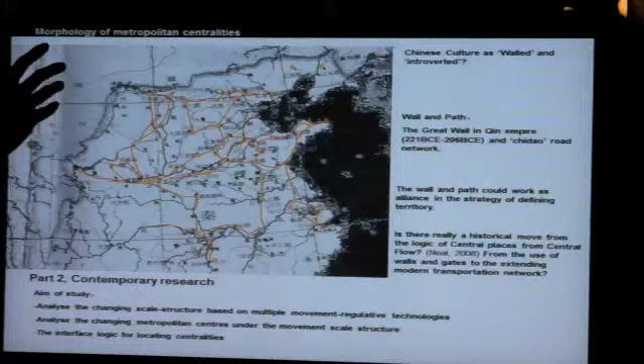I'll focus on this strategy of making paths or making networks, and how making networks could be a strategy.

This could be a spatial strategy to further stabilize the centralities we had before, in two scales: metropolitan and local scales.

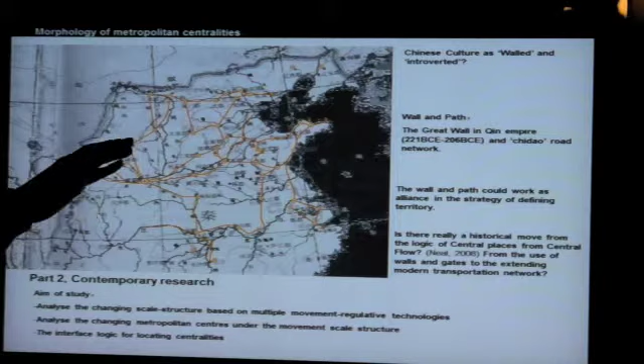There was a belief among central flow theorists that there was a historical transition from old cities to our contemporary urban life. It used to be that walls and gates regulated our daily movement in the city, but now it's more like open networks that play a dominant role.

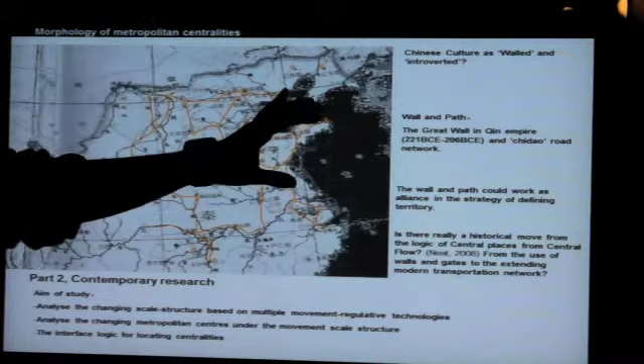So there's a kind of transition from the logic of central place theory to central flow theory, and I'm doubting if it is true. That's also a question I bear in mind for the next part of the research.

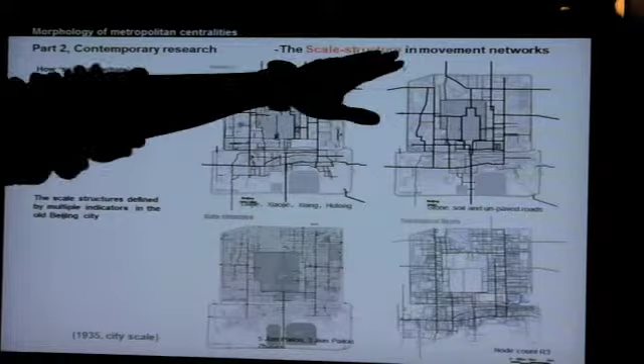First, I need to explain how this scale structure in movement networks was articulated and constituted. It is defined by multiple movement regulation technologies throughout history.

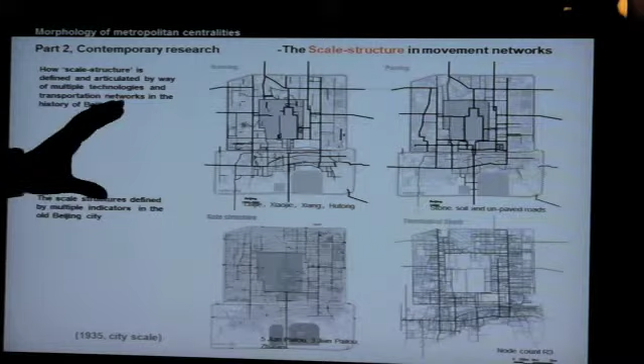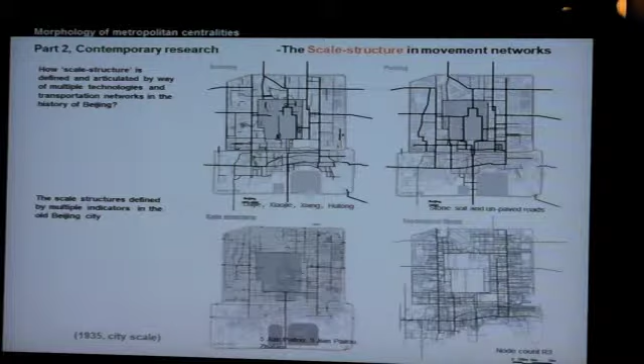In traditional historical cities, there were many systems showing that space is different. Certain streets are used for traveling between different cities, certain spaces for traveling between neighborhoods, and certain streets designed only for travelers inside the neighborhood.

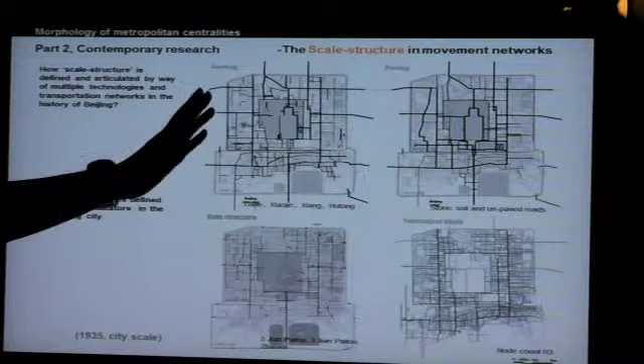This is reflected in the naming of streets. For instance, in Chinese we say 大街 (great street), 小街 (little street), 巷, and 胡同. There is a hierarchical structure in the way streets are named.

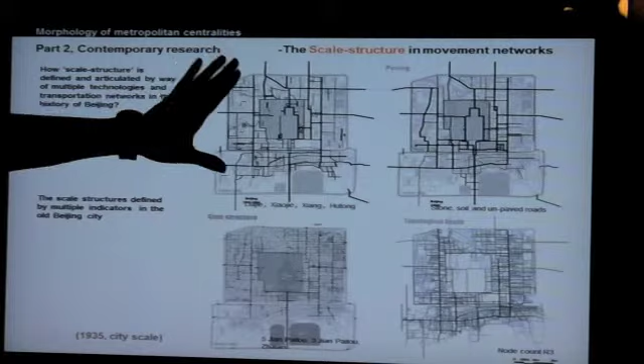This map shows that kind of structure, which is also reflected in how streets are artificially paved. Important streets are paved with expensive, dedicated stones and are wider, while minor streets are sometimes unpaved or just paved with soil.

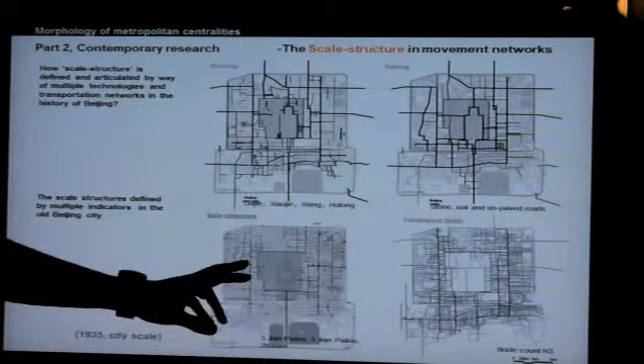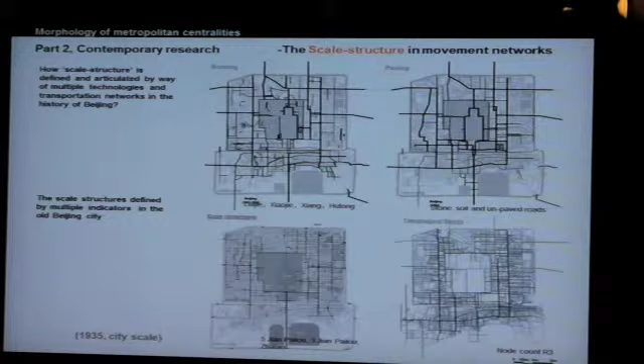This can also be seen in how gated structures, as I showed before, are placed. Important streets have well-decorated gated structures with more entrances, while minor streets have very simple gated structures. From this, we can see similar structures.

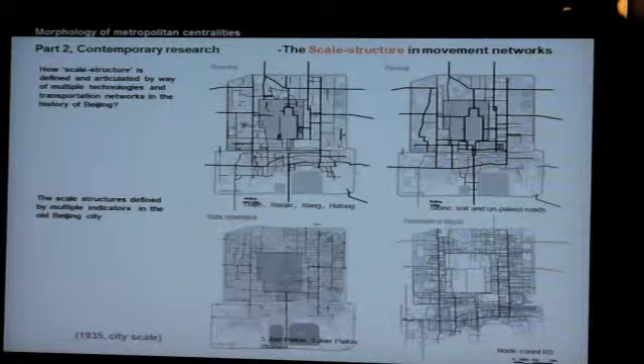We also have other technologies like space syntax and other configurational techniques to show this kind of difference, and for the regional scale we can see similar examples.

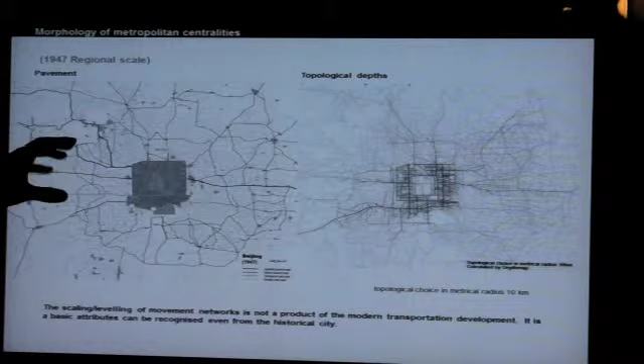This map shows the different types of pavement, compared with the space syntax maps. I have also studied different transportation technologies, like the development of railway and highway, and on this map I only show the development of buses.

It's not as simple as saying railway represents regional or national scale movement, because the bus was initially planned as a city bus, suburban bus, and regional bus, used for traveling between the satellite towns and Beijing.

So each transportation mode doesn't fit into just one type of scale structure.

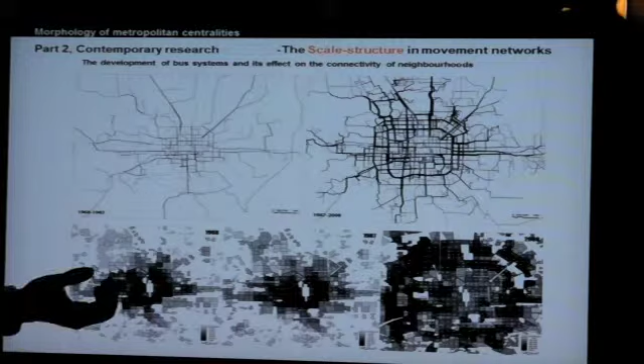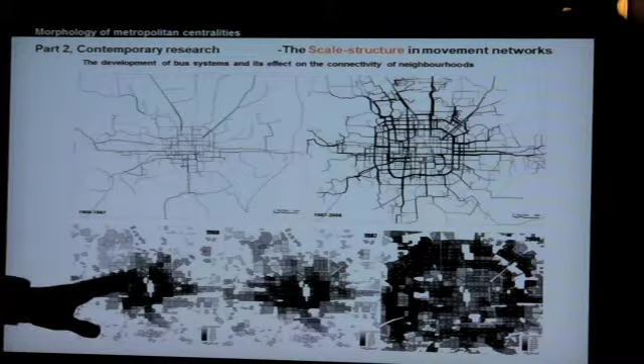This map shows the development of the bus system and the different connectivities between neighborhoods during that period based on the bus system. Another thing I want to say is when we compare this with the centralities, or the gathering of commercial functions.

When we look only at how each neighborhood is connected by the bus system, in the 1980s it fits very well with the distribution of shops, because at that time people's movement depended heavily on public transport. Very few people had private cars, so they would only use bikes and buses. This logic is quite clear.

But now, buses have somehow lost their importance in reflecting the distribution of commercial activities, because we have more choices. The metro system now plays a more important role.

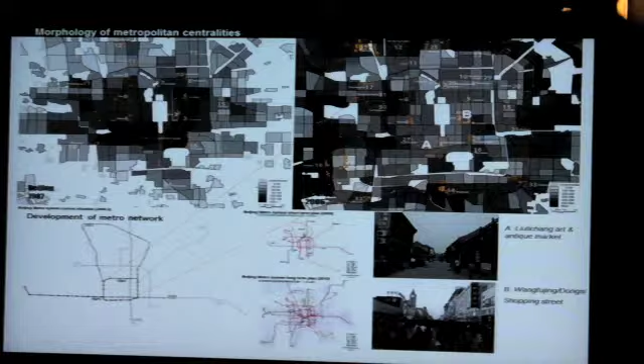To analyze this condition, we need to consider multiple transportation systems together. The scale structure is a potential tool to analyze the distribution of centers, because it's developed based on sorting different types of transportation networks into scales, based on how they are used.

This map represents the city-scale movement network of Beijing. The thick lines represent spaces used for longer distance traveling, like traveling between cities in a region, while the thinner lines represent spaces for traveling inside a city.

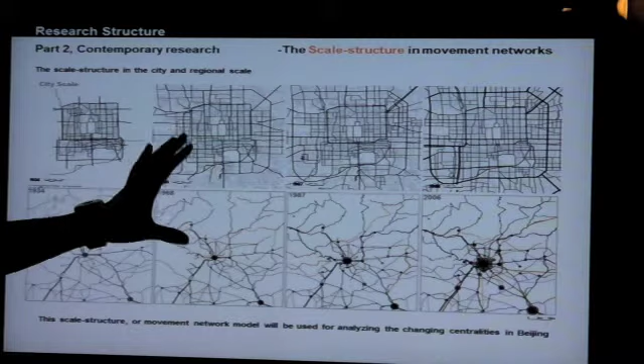In the same way, we can see how it developed at the regional scale. I'm trying to use this spatial model as a tool to analyze the spatial logic of changing centralities in two distinct scales: metropolitan and local.

For instance, at the gates between inside and outside, activity is instead located on an interface between external movements and internal movements. In detail, it's actually located on a ring structure — an intermediate space between higher-scale movement, traveling between cities, and internal movement.

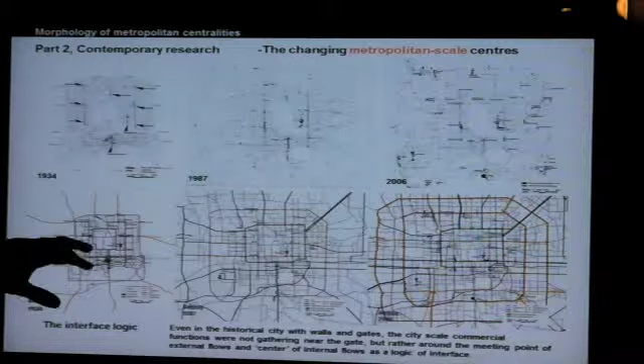It's actually the center of internal movement, because the geometrical center of Beijing is the Forbidden City, so you cannot really travel through that. This kind of logic can also be seen in later development.

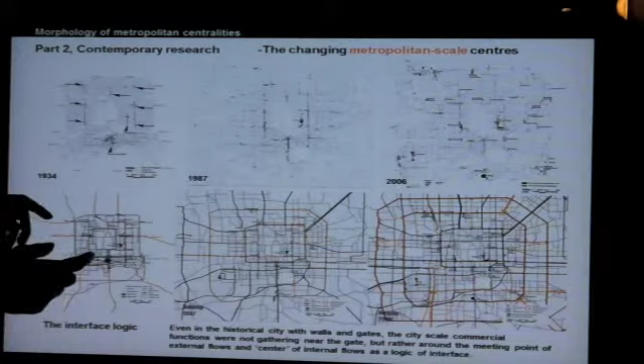This ring structure just keeps growing bigger with the rescaling of the city. I think this interface logic has the potential to be found elsewhere too.

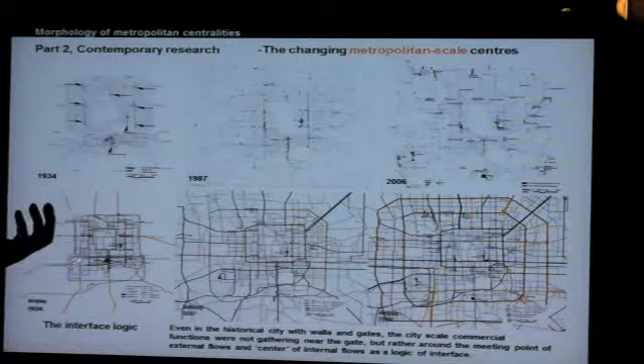I'm trying to test if this interface logic could be found at a local scale instead of just the metropolitan scale. Therefore, in this part of the research, I'm focusing only on local scale centers.

The definition of these local scale centers is based on the gathering of local people and local-based commercial activities like grocery stores, small food markets.